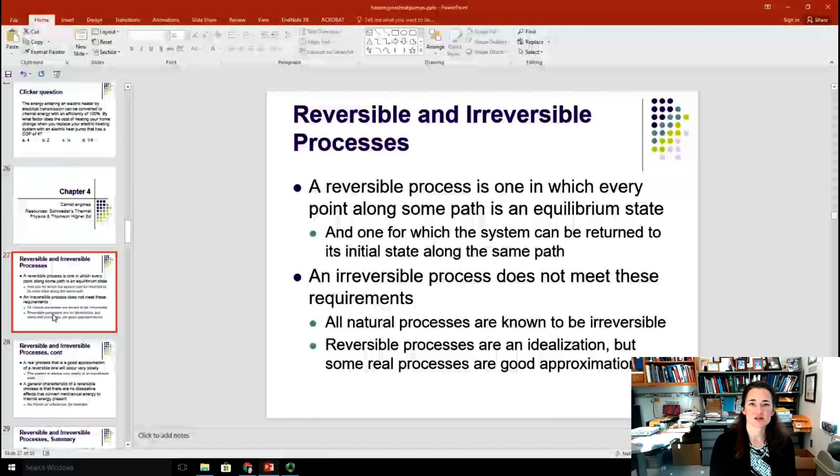It's true that all natural processes are known to be irreversible. Reversible processes are really an idealization because nothing's perfect. There's always going to be friction, there's always going to be dissipation of energy and loss. But some real processes can be good approximations to the truth. Unfortunately, what that usually means is that the process is very slow, but we'll get to that more in a second.

If you want to keep something in an equilibrium state at pretty much every point along the way, then you have to have the process be slow so that at every step it can equilibrate again. So you make a tiny change, you wait, you make a tiny change, you wait, you make a tiny change, you wait. That's why the processes are slow, okay?

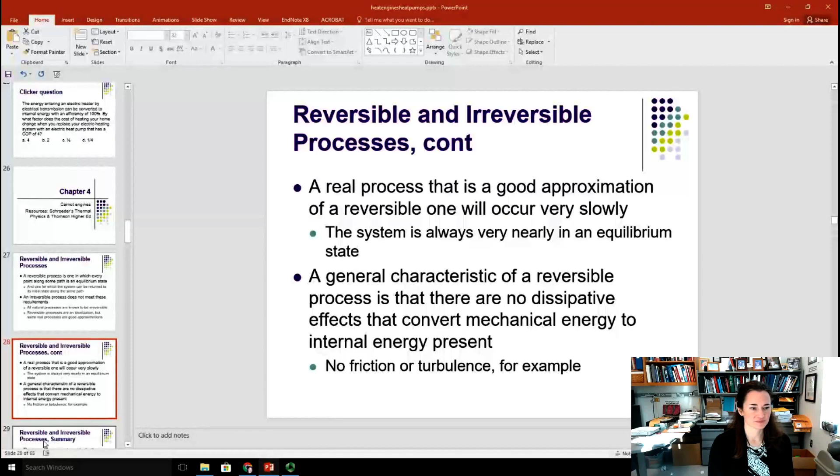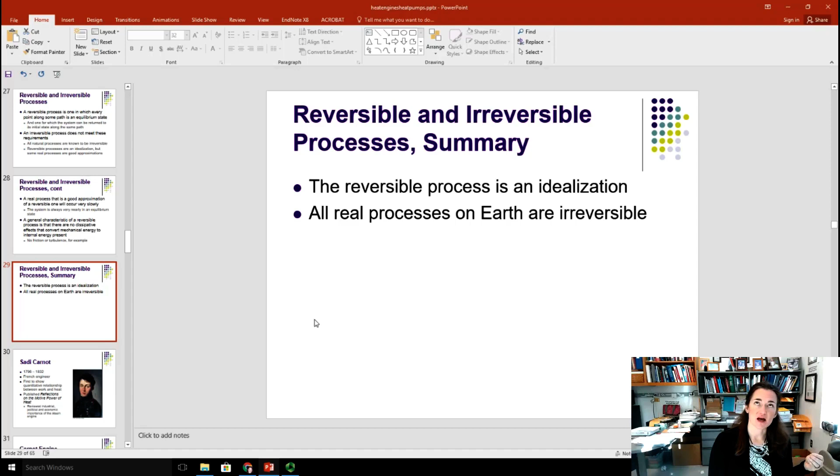A general characteristic of reversible processes is that there are no dissipative effects that convert mechanical energy to internal energy, like friction or turbulence. And of course, that's really hard to achieve in real life. So all reversible processes are actually idealizations, and all real processes on Earth are irreversible. But they do give us a goal to shoot for in what could theoretically be achieved, and that's where the Carnot engine comes in.

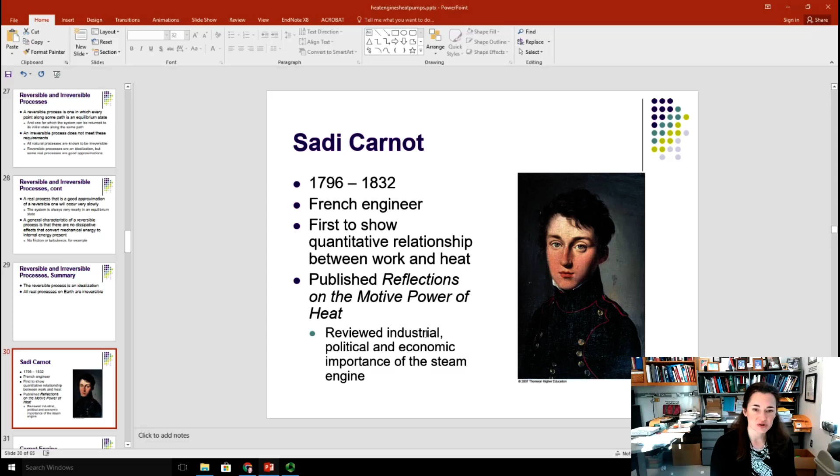Carnot lived from 1796 to 1832, so he had a short lifespan, but he managed to do quite a lot with the time that he had. He was a French engineer, and he was the first to show that there was a quantitative relationship between work and heat. His publication, Reflections on the Motive Power of Heat, reviewed the industrial, political, and economic importance of the steam engine.

So, a Carnot engine is a theoretical engine that was developed by Carnot. It's a heat engine that operates in an ideal reversible cycle that we now call the Carnot cycle in his honor. It operates between two reservoirs at given temperatures, and it's the most efficient engine possible. Since it's a theoretical construct, it's what all other engines shoot for, and it sets an upper limit on the efficiencies of all other engines.

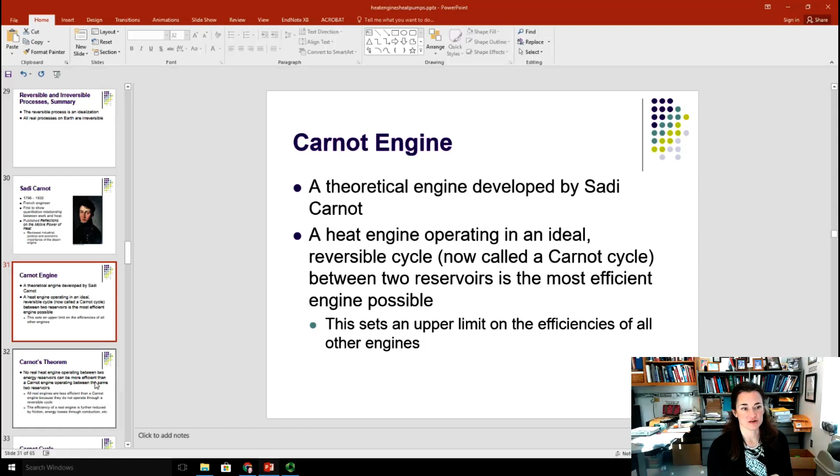No real heat engine that operates between two energy reservoirs can be more efficient than a Carnot engine operating between those same two reservoirs. In other words, all real engines are less efficient than Carnot engines because they're not reversible. So the efficiency of a real engine is also going to be further reduced, even though you can't have a reversible cycle in a real engine. You're going to have it even more reduced from that because of friction, energy losses, turbulence, things like that.

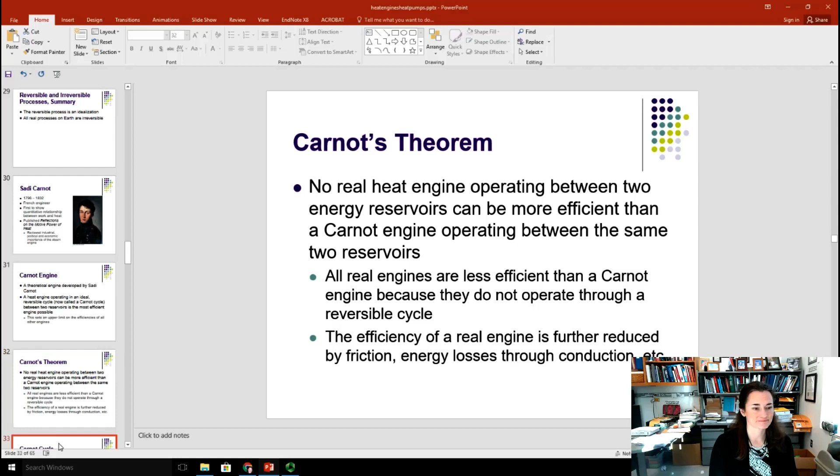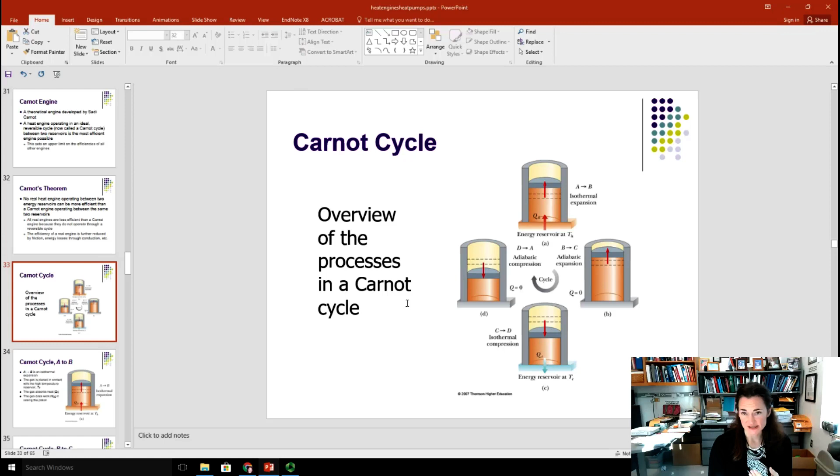So we're going to talk about what the Carnot cycle processes are. But to sum up really quickly, it contains two isothermal processes and two adiabatic processes. Let's go through them step by step.

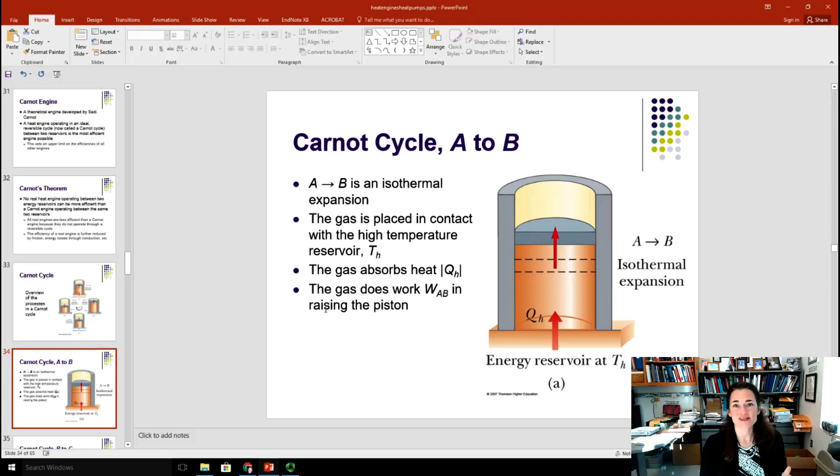We're going to call the first step in the Carnot cycle moving from A to B, and this will make more sense in a second when I show you the PV diagram. A to B is an isothermal expansion. What happens is you place your gas, the material operating in a cycle, in contact with a high temperature reservoir at some temperature T sub H. At this point, the gas absorbs heat, which we'll call Q sub H, and the gas does work in raising the piston, because when it's in contact with a hot reservoir, hot gases expand, so it raises the piston because of that expansion.

Now, in step B to C, you have an adiabatic expansion.

Basically what happens there is that you place an insulator in contact with the base so that it can't draw any more heat energy from the hot reservoir, but the gas continues to expand just a little bit. No heat is going to enter or leave the system at this point. The temperature starts to fall from TH to TC, and the gas continues to do work, W sub BC.

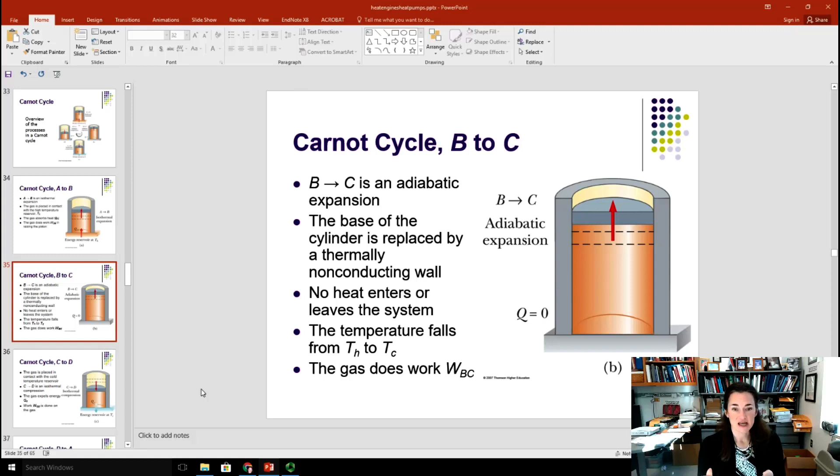The gas is then placed in contact with a cold temperature reservoir, and then you have an isothermal compression. The gas expels energy, Q sub C, and work CD is done on the gas.

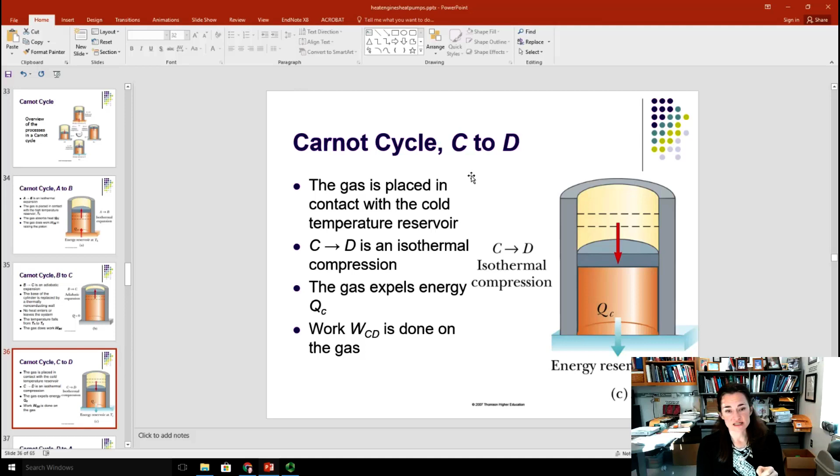And then finally, D to A, taking you back to your starting point, that's an adiabatic compression. The gas is again placed against a thermally non-conducting wall, so no heat's exchanged with the surroundings, and the temperature of the gas increases from Tc to Th. The work is done on the gas, work W sub DA.

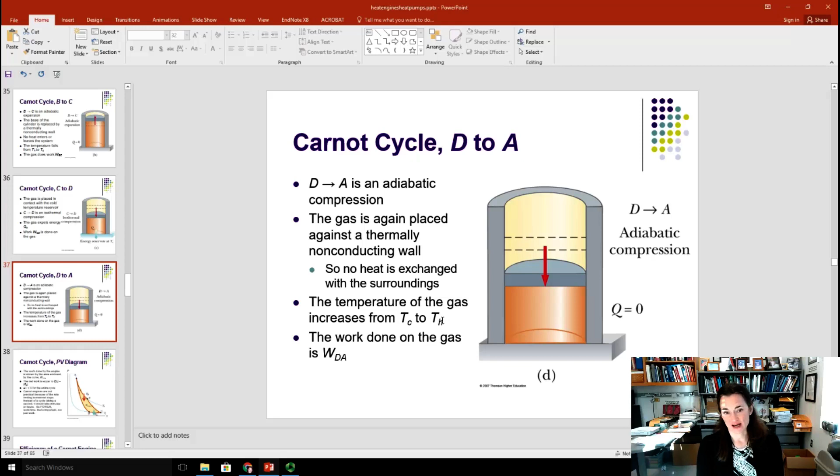Now if we put all of this stuff that I just described into a PV diagram, then you can see the two isothermal steps there. You have the isotherms at T sub H with the hot reservoir and T sub C with the cold reservoir. So you can see that A to B follows that isotherm T sub H.

Then remember that adiabats are steeper than isotherms. So when you go from B to C, you have the adiabatic expansion B to C. And then you have the isothermal compression, so it follows the isotherm T sub C at the colder temperature. And then yet again, adiabats are steeper than isotherms for the compression that goes from D to A.

Now because it's a cyclic process, the change in the internal energy for the cycle is going to be equal to 0. And so that means that the net heat is going to equal the magnitude of the net work.

Also remember that for cyclic processes on PV diagrams, the work done by the engine is going to be the area enclosed by that curve. So it'll be in this kind of beige shaded region right here that gives you the work of the engine. That net work is going to equal QH minus QC because of energy conservation.

Now, Carnot engines are a great theoretical construct and they set upper limits on efficiencies, but they're really not practical. And that's because the isothermal steps would be really rate limiting. Remember, adiabatic things can be really fast, but isothermal processes are generally much slower. And so what that would mean is that if you took it through a cycle, it would take minutes or hours to go through instead of a fraction of a second.

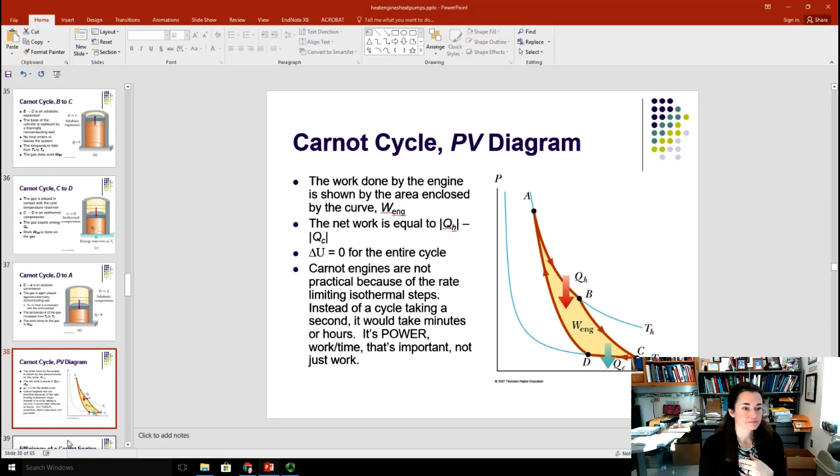Now, Carnot showed that the efficiency of the engine for this process would depend upon the temperatures of the reservoirs. And so we still have the two equations for efficiency that worked for all engines. The efficiency is equal to the work of the engine divided by Q sub H, which is equal to 1 minus Q sub C over Q sub H, absolute values.

But for the Carnot engine, you can also add on an extra equation that the efficiency would equal 1 minus Tc divided by Th, where Tc and Th are the temperatures of the cold and the hot reservoir in Kelvin. All the Carnot engines operating between the same two temperatures are going to have the same efficiencies. So it's really for a Carnot engine just about the temperatures of the cold and the hot reservoir.

Now looking at this equation, you can see that the efficiency would be 0 only if the temperatures are the same for the cold and the hot reservoir. Of course that doesn't make any sense, so there you have it. The efficiency would be 100% only at absolute 0, so you can see how unachievable that would be.

The efficiency is going to be increased as Tc is lowered and Th is raised. Now, in practical cases, Tc is going to be near room temperature, roughly 300 Kelvin. And what you have to do to increase the efficiency is to increase the temperature of the hot reservoir.

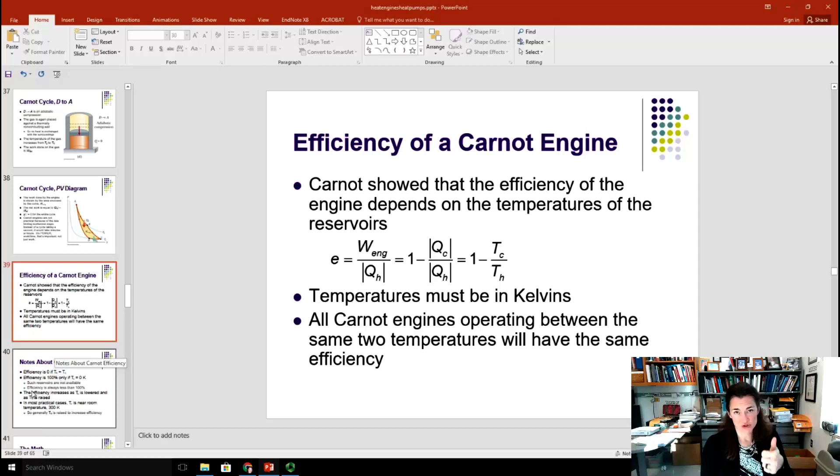Now, why is this equation true, this 1 minus Tc divided by Th? Remember that for quasi-static processes, the change in entropy equals Q divided by T. So the entropy dumped to the cold reservoir, delta S sub C, equals QC over TC.

That has to be greater than or equal to QH divided by TH, which is the entropy drawn from the hot reservoir. That's the second law of thermodynamics. If you rearrange that equation, you get QC over QH is greater than or equal to TC over TH, just doing a little cross multiplication with your QC, TC, QH, TH terms.

So you can see that if you plug in TC over TH for QC over QH, you get an inequality: the efficiency equals 1 minus QC over QH, which is less than or equal to 1 minus TC over TH. This is the Carnot efficiency that places that upper limit. The efficiency will always be less than or equal to that. It'll be equal only for Carnot engines, and less for all real engines.

The explanation in words is that it's an upper limit because in this engine, the entropy gained from the hot reservoir would have to be the same as the entropy dumped to the cold reservoir. And since in all real engines entropy increases, this is just an impossible dream.

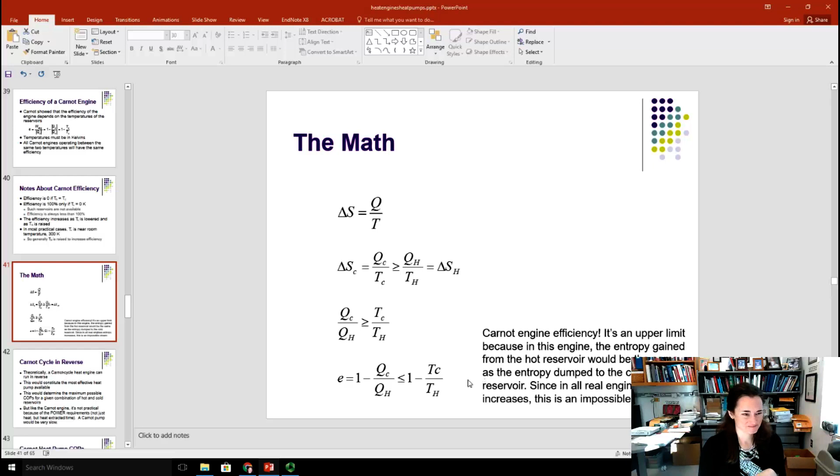Now you can also have Carnot heat pumps and Carnot refrigerators. Theoretically, a Carnot cycle heat engine could run in reverse, and if it did, this would be the most effective heat pump available, giving the maximum possible coefficient of performance for a given combination of hot and cold reservoirs. But just like the Carnot engine, it's not practical because of the power requirements.

Remember that time is very important here when talking about heat pumps, so it's heat extracted over time. A Carnot pump would be very slow.

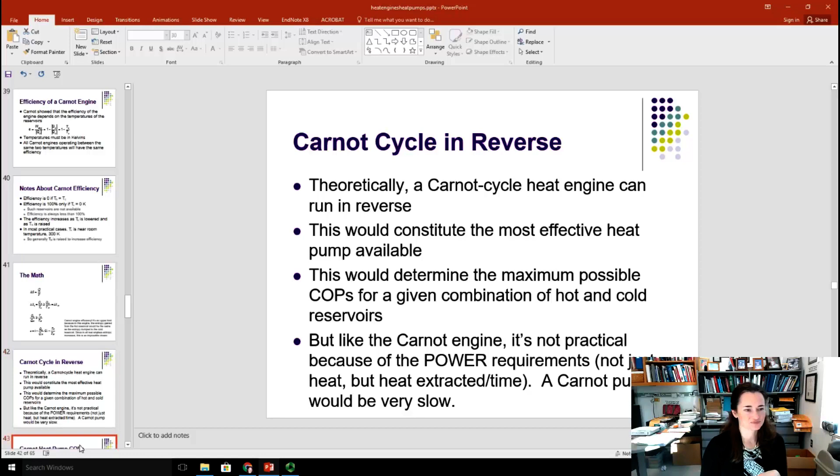Now, Carnot heat pump coefficient of performance equations. Basically we have the same kind of thing as before. In cooling mode, like inside a refrigerator where you want to make the inside of the cold box colder, your entropy delta SH dumped into the hot reservoir would equal, quasi-static equation here, QH divided by TH, which would have to be greater than or equal to QC over TC. Rearranging, QH over QC would be greater than or equal to TH over TC.

Now the coefficient of performance in cooling mode would be QC over W, or QC over QH minus QC, using energy conservation equations relating work to the heat extracted. If you rearrange that equation and divide the top and bottom by QC, you end up with 1 over QH over QC minus 1.

Or if you write that in terms of the ratio QH over QC, that would place TH over TC there, with your less than or equal to sign. You end up, when you multiply through by TC, with the equation TC over TH minus TC. That's the coefficient of performance in cooling mode.

And you could do the same thing in heating mode. The coefficient of performance in heating mode follows very similar mathematical steps, and you end up with the coefficient of performance in heating mode being TH over TH minus TC. So that's the theoretical limit for Carnot heat pumps and air conditioners.

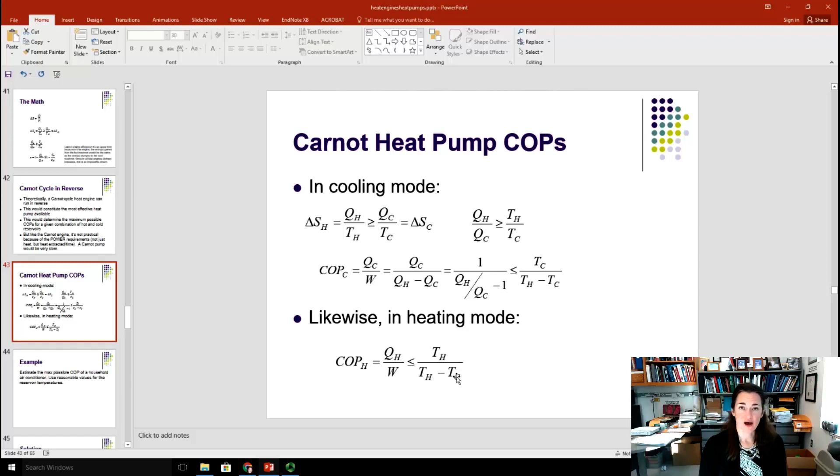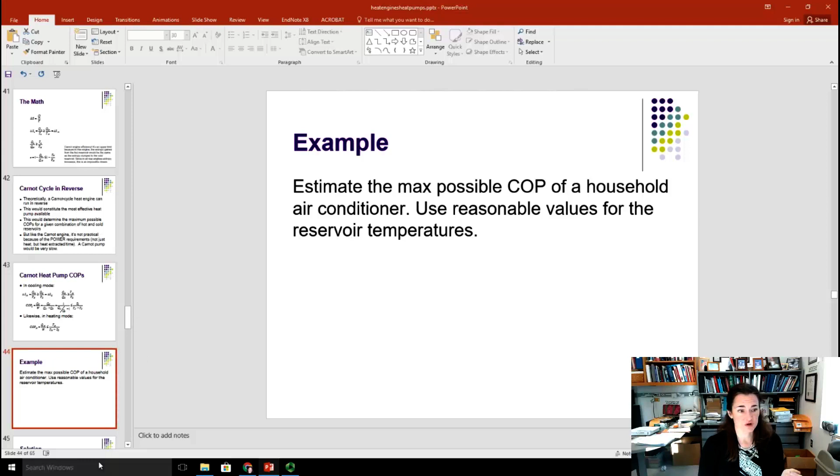Let's estimate the max possible coefficient of performance for a household air conditioner using reasonable values for the reservoir temperatures. The coefficient of performance for an air conditioner, for a Carnot cycle, is TC over TH minus TC. Now let's put reasonable temperatures in there.

A goal for inside the home might be room temperature, roughly 20 degrees Celsius, which converts to 293 Kelvin. On a hot day when you'd be running your air conditioner, it might be 35 degrees Celsius outside, which is 308 Kelvin. Plugging into the equation for coefficient of performance, you have 293 divided by 308 minus 293, and you get about 20. Coefficient of performance about 20.

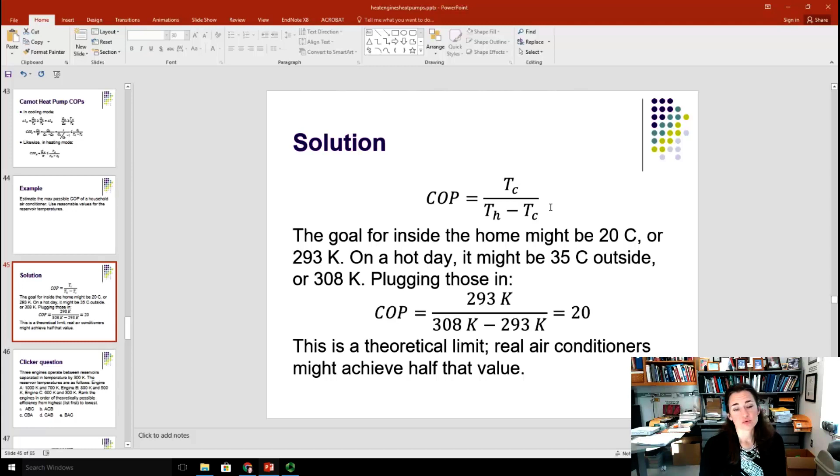Now this is a theoretical limit. Real air conditioners might achieve half that value if they're lucky.

Let me do another example problem for you with a Carnot heat engine. In this example, you have an electric power plant that would make use of the temperature gradient of the ocean. The system would operate between 20 degrees C, the surface water temperature, and the much colder water temperature at a depth of 1 kilometer, 5 degrees C. So what would be the max efficiency of such a system?

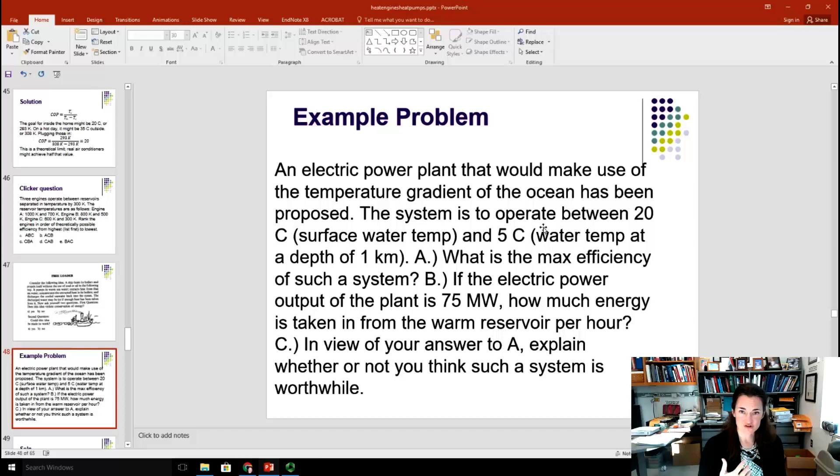If the electric power output of the plant were designed to be 75 megawatts, how much energy would be taken in from the warm reservoir per hour? And then, based upon the efficiency found in part A, explain whether or not you think it would be worthwhile to do this system.

Using our theoretical equations for Carnot heat engines, the efficiency is 1 minus TC over TH for the theoretical limit. Based upon the temperatures given, 20C and 5C, convert those to Kelvin - you always have to convert to Kelvin. So you have 1 minus 278 divided by 293, which gives 0.051, or 5.1% efficiency.

That efficiency also equals the work put out divided by the heat energy extracted, or W divided by QH. However, the problem gives us power, not energy. Remember that power is energy divided by time. So I could divide the top and bottom of that fraction by time, and you'd get efficiency equals work over time divided by QH over time.

We already solved for that efficiency, it's 0.051. Plugging in the necessary power output for work over time, it's 75 megawatts. Then we can find the power extracted from the hot reservoir: take 75 megawatts and divide it by 0.051, and you get 1470.6 megawatts. That's the power you'd need to extract from the hot reservoir.